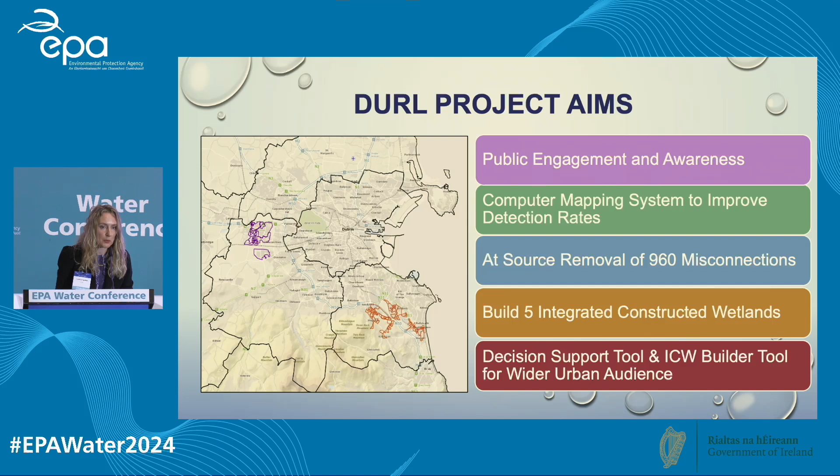So, first of all, the main thing is to explain what a misconnection is, and I'm going to play this animated video that has been developed by the project. It's going to identify what a misconnection is, the environmental impacts of it, and how it can be repaired. And this is a 1-minute animated video that will be available after this conference on social media. So.

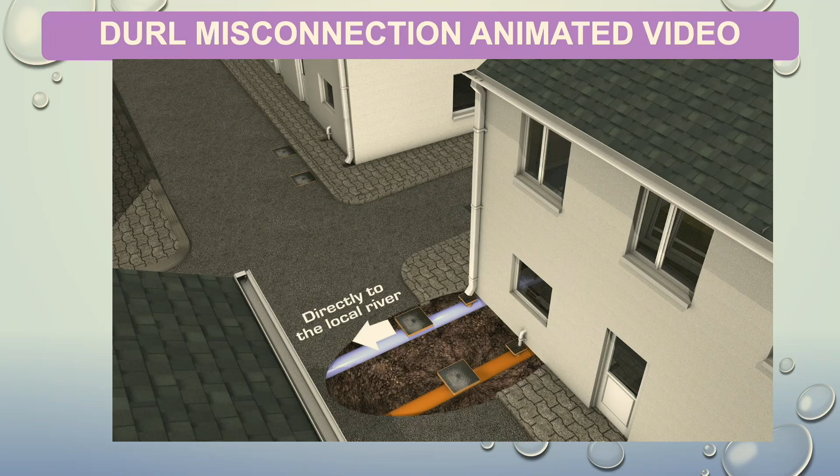In urban areas, there are 2 drainage systems. Stormwater drains take rainwater from roofs, paths, driveways and gullies and discharge directly to the local river. Foul sewer drains take the discharges from household appliances and drain to wastewater treatment plants. A misconnection occurs when household appliances are mistakenly connected to the stormwater drainage system instead of foul sewers. Consequences can be serious, and many hundreds of houses can be misconnected.

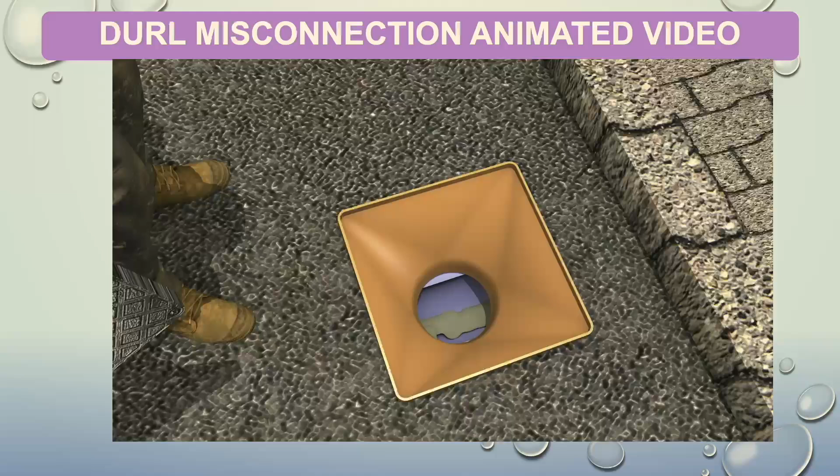Misconnections cause pollution, emit bad smells, create an unhealthy environment and damage to aquatic life. Homeowners are responsible for their home. The majority of misconnection repairs are affordable, and a homeowner or a tradesperson can make the repairs. The main consideration is that they use the right pipes and fittings. Fixing misconnections will improve water quality in your area, safeguarding it for future generations.

Okay, so the education and awareness aspects of the project, they were pivotal. So we engaged with the local communities to highlight the importance of their river and raise awareness about misconnections, and that was pivotal to bringing local communities on board. And we had a number of events since the outset of the project, and you can see here I've listed some events that have taken place already since 2024, including Eco Week, where we met with local secondary schools, carried out workshops there.

Biodiversity Week, met with members of the local community, carried out some workshops at some of the Dodder Valley Park wetlands that we had, with some members attending the Biodiversity Week workshops that had been there at the planting of the wetlands, and they wanted to come back and see how their plants were getting on.

Also, we have some images there from our Green Estate demonstrations, and these are where we meet with local communities, also community groups and residents association groups and public representatives, and we'll meet with them on a patch of green in their local estate or their local park, and we have developed a prototype of the commonly misconnected

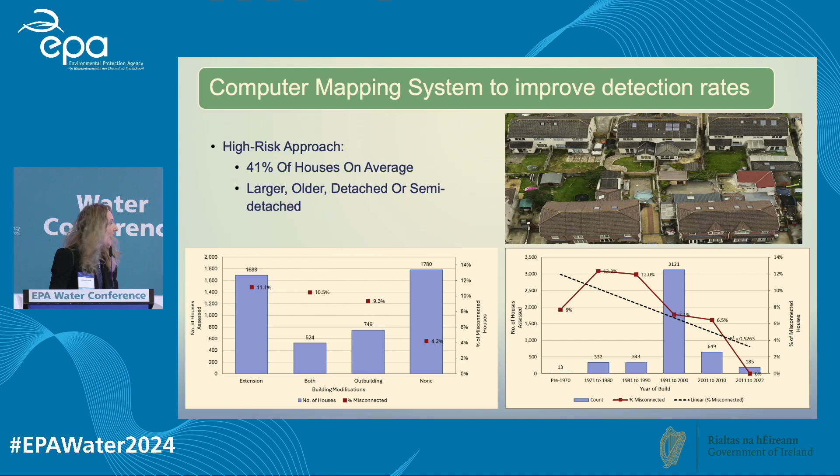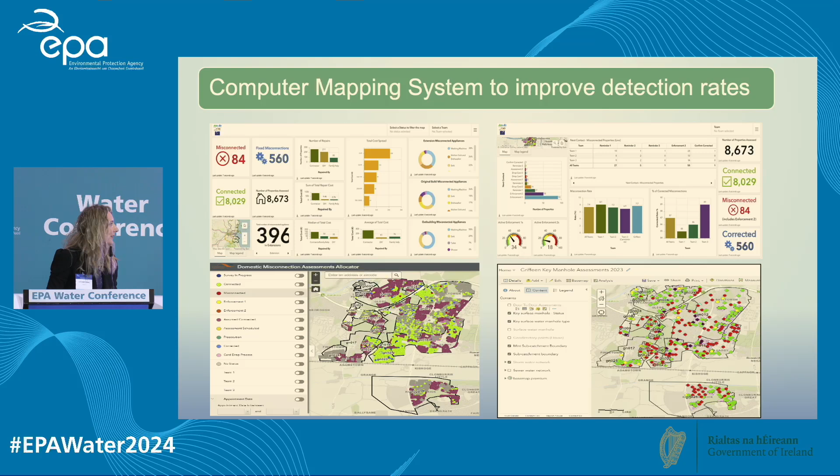And by using GIS, that enables us then to develop apps that could be used by our stormwater assessors in the field. So we were able to track real-time data from the assessments that were being carried out by the stormwater assessors. And we also developed some dashboards, and they're up on the top of the screen. There's 2 dashboards, and I'll go through some of the detail that was collated from our assessments and what's visible there in the dashboards as I go through this presentation.

Okay, so we identified an objective of the removal of 960 misconnection appliances at the outset of the project. And really, to enable us to do that, we placed a huge emphasis on engagement with the local community and the importance of enhanced water quality. And we allowed the homeowners time to make the repairs and make good the connections. And this was key because the homeowners were responsible for the repair and cost of that repair of their misconnection.

So the homeowners really got on board because we had 99.5% participation, and they really want to get involved and help their local rivers. We assessed more than 8,670 houses, and of those, we found that we had a weighted average of 2.4 visits per house to enable us to get in and do the assessment at that house. So that resulted in over 21,000 contacts with homeowners.

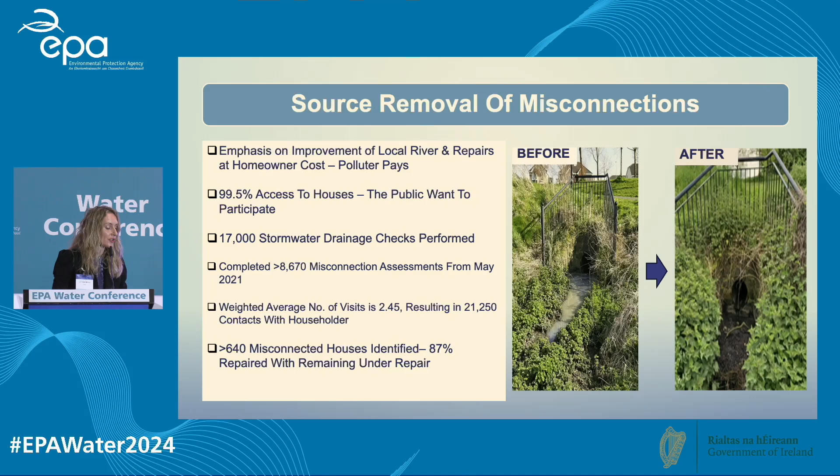And what we have identified is more than 640 misconnected houses, and 87% of those have been repaired to date. So we have 560 houses that have repaired their misconnection, and the remaining are under repair. So these are just a few graphs just to kind of break down that information.

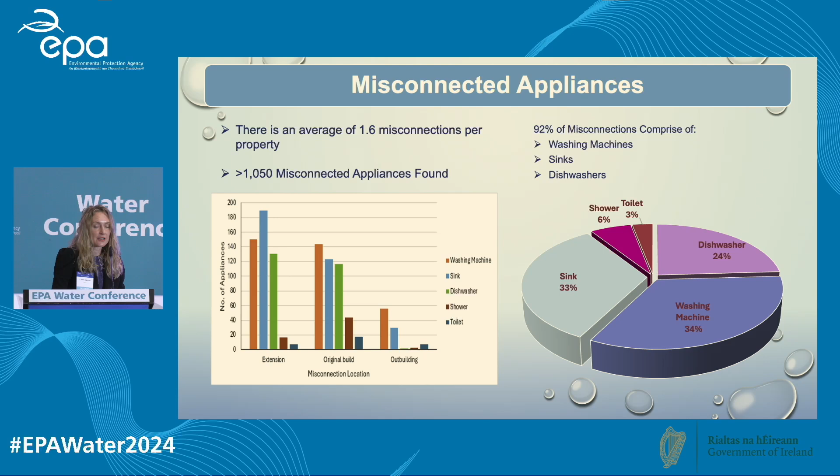And how does that break down in terms of cost for the homeowner? So we've identified that 47% of the repairs were carried out by the contractor. So the majority of repairs were carried out by the homeowners, with 53% carried out between family help and DIY.

And the cost has been really affordable from the feedback that we're getting from members of the public. With family help, the median cost is €37 and DIY €50, because in the main, the pipes and materials that they need to carry out these misconnection repairs are readily available in every local hardware store, and sometimes in your shed, because it's generally long pieces of white pipe and some brackets.

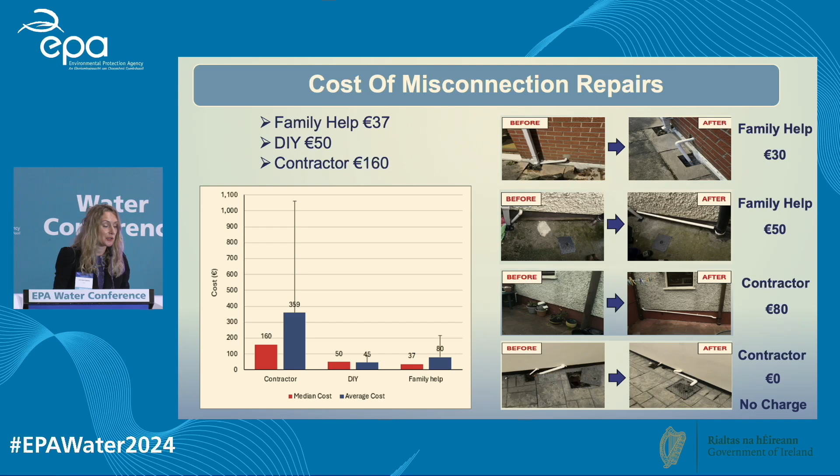And then the fourth example is where the homeowner still had the contractor's details and was able to contact them, and they came back. We did have to meet with them, and we did have to do a dye test just to confirm for them, but they came back and did the repair with no charge. We've actually had 40 contractors that have come back and done the repair with no charge. So we're hoping that they won't do any more misconnections in future.

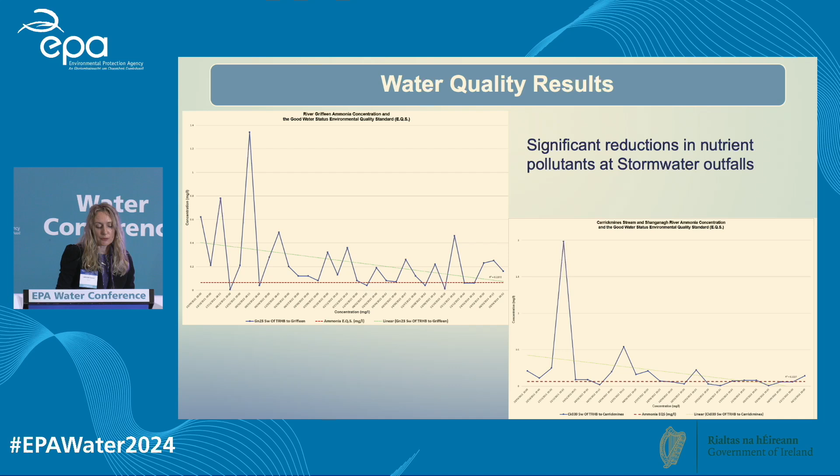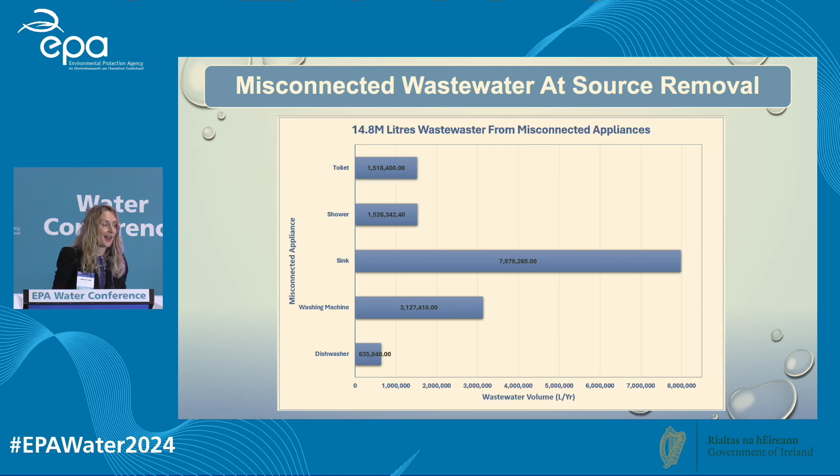Okay, so that's the door-to-door side, and then just to give details, and I see the clock is going towards the red. So we said we would build 5 integrated constructed wetlands. We've built 3 so far. We've 2 that we're going to build this summer.

So the 3 that we've built, one of them was in Griffeen Valley Park, and that was built in July 2022. The second one was in Dodder Valley Park. This one is called GR35, and that was built in August 2022. And then the third one in Dodder Valley Park on a very steep slope was built in September 2022. So in general, they took about 6 weeks each to be built.

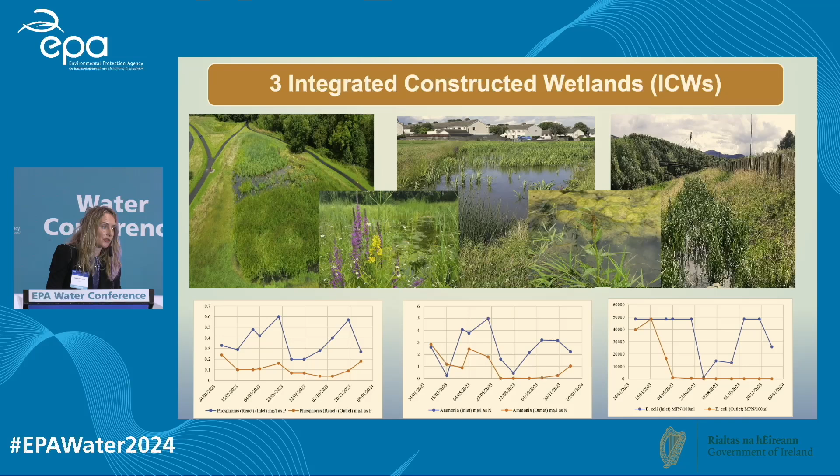And also we were seeing really good results between the inlet and the outlet samples that we were taking. So the blue here at each of the graphs is the inlet, and then the orange line, that's the outlet values. The first graph is the phosphorus, the second is ammonia, and the third is E. coli. And this year we've noted 70% removal for phosphorus, 96% removal for ammonia, and 100% removal for E. coli.

And so I mentioned that we've built 3 and we've got 2 to build. The Poddle ICW is a collaboration between the Office of Public Works and the DURL project. They're building the wetland as part of the flood alleviation scheme. After 3 years in the planning process, An Bord Pleanála's planning decision favourably considered the wetland as an ecological and water quality enhancement measure that would mitigate the adverse impacts of the flood alleviation scheme, and that was granted planning. So that will be developed this summer.

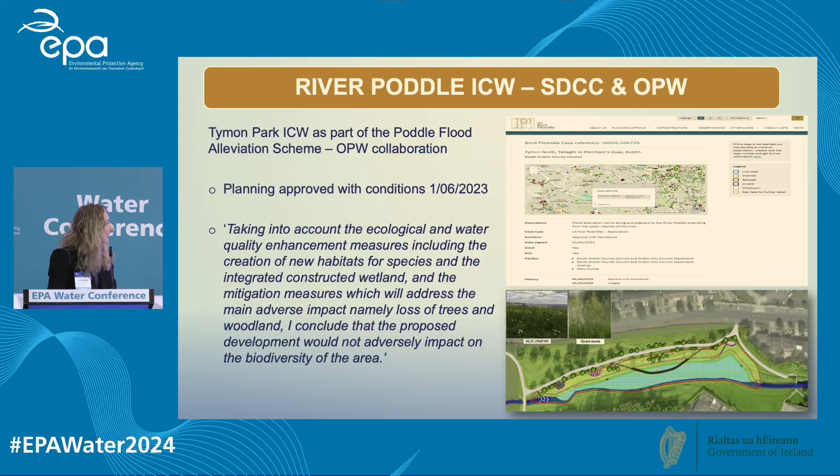And then the 5th ICW is going to be built in the Dún Laoghaire-Rathdown County Council area on the Trimbleston Stream. And, sorry, there we go. This is a very flashy stream with urban pressures. It was identified by the UCD Acclimatize study as a stream with sources of fecal indicator bacteria that was affecting both Merrion Strand and Sandymount Strand. This stream is quite unique in that a considerable area of the N11 is drained to this stream.

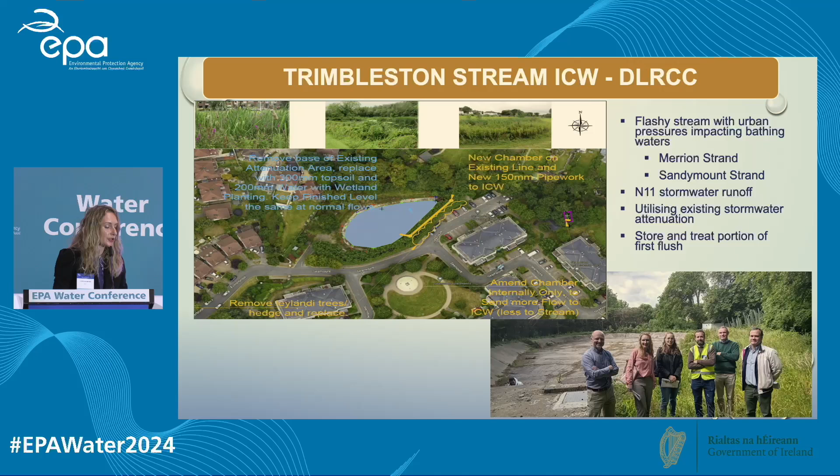And then the last objective that we have was to develop a decision support tool and ICW builder, basically to replicate the actions that the project has learned over the course of our work. And the decision support tool is basically a 10-step program to bring users through the GIS side of the project, and also to provide the templates and the letters and the standard operating procedures that we used in the door-to-door assessment work.

And the ICW builder gives all the information required based on our experience of building the 3 wetlands, between the scoping of a site, the sizing of a wetland, the spoil that would potentially be generated, and then it also gives information on specifics to consider, and also the planning side of it and the tender side of the development of a wetland. So that's the end of my presentation.